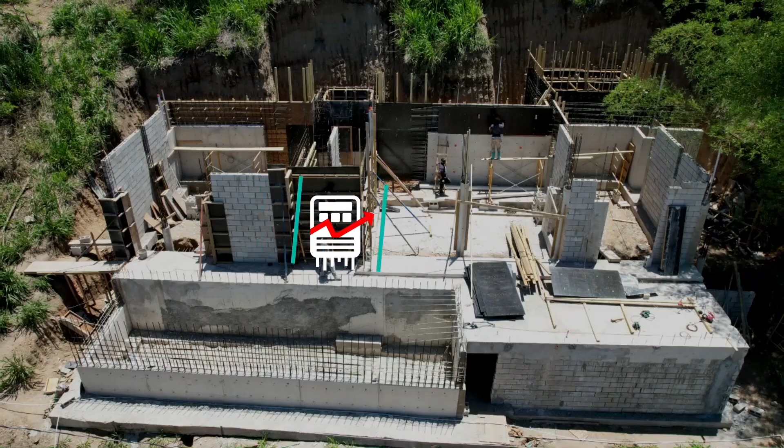Today I will be doing a video that I don't plan to do another time, because I'm going to change the rules of engagement as it relates to the type of work that I'll associate myself with. I'm trying to get stricter because it seems like persons who want to do construction think that organizing and getting work done is just a matter of coincidence. I've said many times that you can't expect good outcomes when you do bad planning.

So the topic of the day will be Pennywise and pound foolish again. What you see on display is a drawing that was sent to me related to consultation and management. Upon looking at it, I can see it has a lot of flaws. Based on the amount of detail a person puts into a file, it tells me a lot about the person doing the drawing, as well as the type of customer.

Many times, the customers who go for these persons assume that spending a certain amount of money on a drawing file is too much. So they'll take almost anybody willing to do a drawing, as long as they hear that person has connections to the parish council to get things approved. I'm told this person did similar drawings in the same community and got them approved. I don't know how, but based on the work ethic I'm seeing here, it's not in any kind of order for anybody to go to any parish council and even be considered serious.

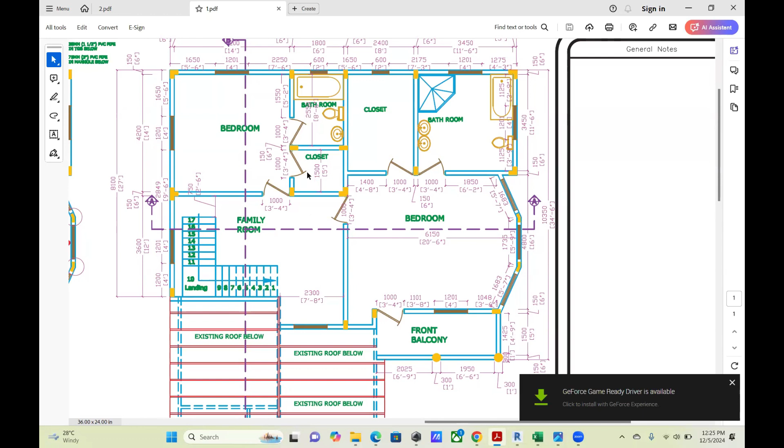This is an issue I keep bringing up because I see so much of these drawings coming to me. Whenever I mention that the coordination of the file is not done properly, people often try to justify it by saying the parish council has approved it, or the person who did the drawing has done many drawings before, some kind of bullcrap like that. But with my experience, I know that whenever things are out of line, it becomes problematic on the ground.

You don't want a scenario where the person executing the construction is the only one who knows how to add additional elements, because that's a big gamble. That person can turn around and spoil your building, and you wouldn't be able to know until it's too far gone. So the proper method is always to get the proper files done, and then move up the ladder to additional professionals.

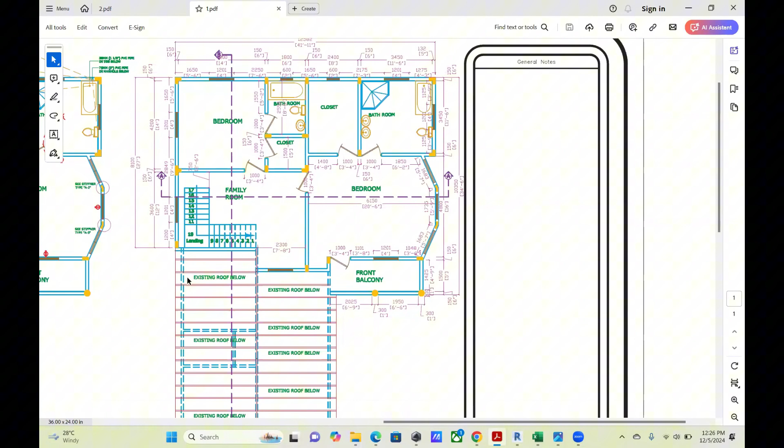Now, this drawing has a lot of errors, one of them being this staircase, and I'm going to mark it up for that reason. One thing I've done is not put the customer's name on this video, as well as the person who did the drawing, because I'm not trying to go down that line. But this step really makes no sense.

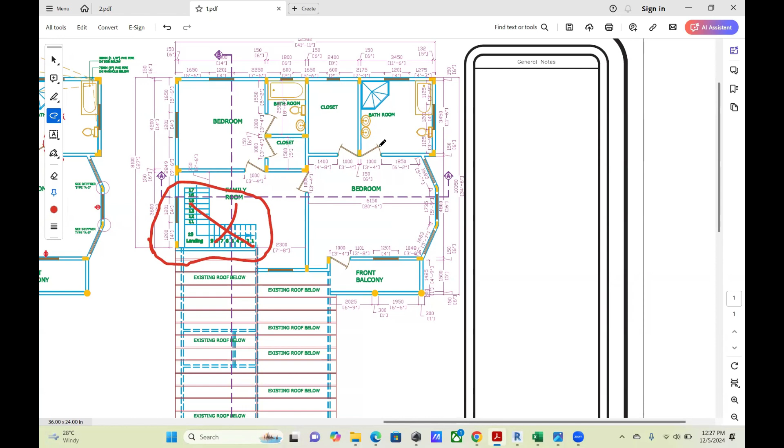2 feet 6 when you're exiting a staircase on a landing makes no sense. This is a no-no. This bathroom, you can see the lower level of attention that the person is giving. Either the person is not properly experienced or the person just does not care.

So this is a bathtub, this is said to be a shower, a very irregular shaped shower. And then this is, I think, trying to say that there's going to be a double face basin. But the fact that the door is swinging onto the basin again shows that the person is not paying attention to detail.

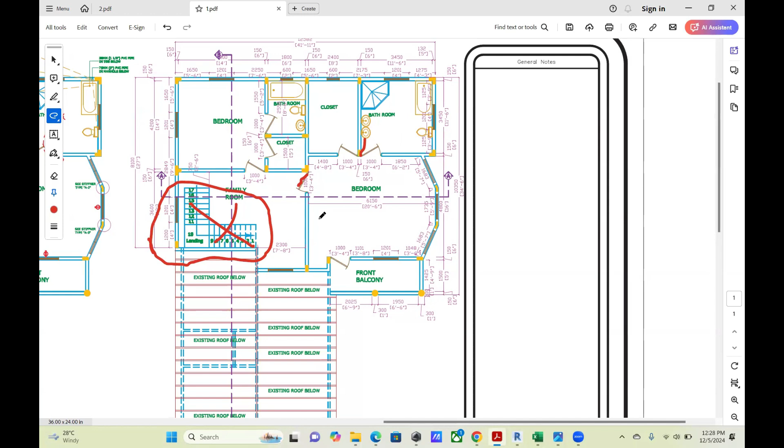Now, other flaws that I can see here: one bedroom door is swinging inwards, this bedroom is swinging outwards. And I'm assuming that this is the master because you have the bigger bathroom. So this is another pointer error that is on display.

Now, on the ground floor, there's also a few things out of line. Between the stairs and this outer wall, there's a difference. So more than likely, there's going to be a cantilever space made on the side, and therefore all of this area is going to be wasted space with little to no usage.

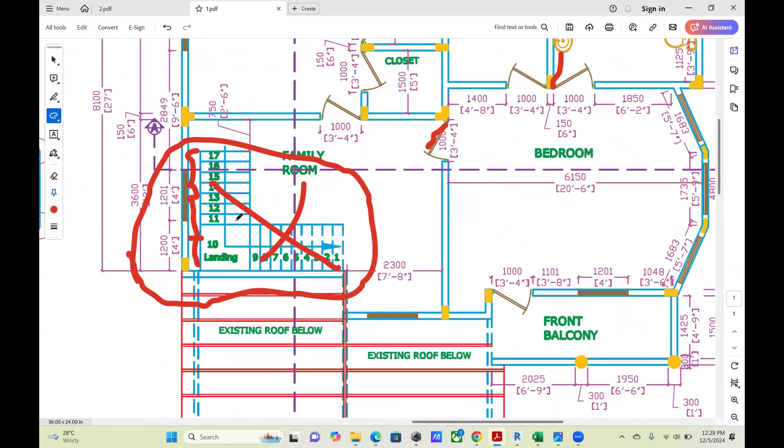Other things to include: how the kitchen is laid out. There's an island within the kitchen, but this island obviously does not have any consideration for things like a person that is going to sit on chairs or etc. Regardless of it being a big kitchen, the space is poorly designed.

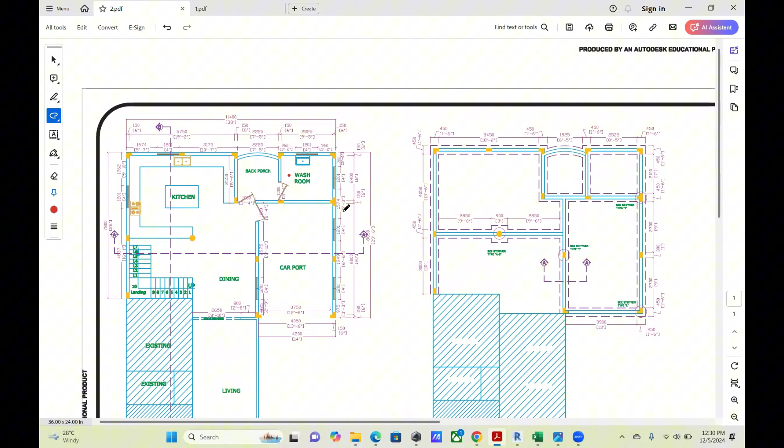Now, the additional things required for this area is that the customer requires a storage area. There needs to be a helper's room or another bedroom that can be used by a helper or as a guest room. That's missing. So the drawing is basically wrong. And because it's that wrong, no matter how you're going to hear a workman say 'hey, I can fix it on the ground,' you are really setting up yourself for a major issue when the work starts.

So that's wrong, and on the first floor, it's pretty much wrong too because it's a similar scenario. The other bedroom is absent, as well as the customer wanted to go on top of the building. There's no setup for that in this particular situation.

Now, Pennywise, when I mention it, I always mention it mostly around drawings. In other cases, you'd have situations where customers get quotations from construction workers and they do not want to pay anybody to do assessments. But I'm not really dwelling on that as yet, because I'm closing off this kind of file. I'm just going to use the drawing again in this scenario.

So this is one of these situations again. The customer has an area that they are willing to work with - in this case, it's 2,800. Person A is saying at least 150. Person B is saying $90. Person B seems cheaper. But the problem with it is this: Person B is not paying attention to the details.

So even when the customer thinks they have saved money, they're still heading along a path that's going to lead to a major accident. The drawing is wrong, the person is not competent enough, and that's why they're giving a lower cost. It's not really the case that they can do similar or better work. It's just the case that many times they are more desperate, so they will drop their costs cheaper.

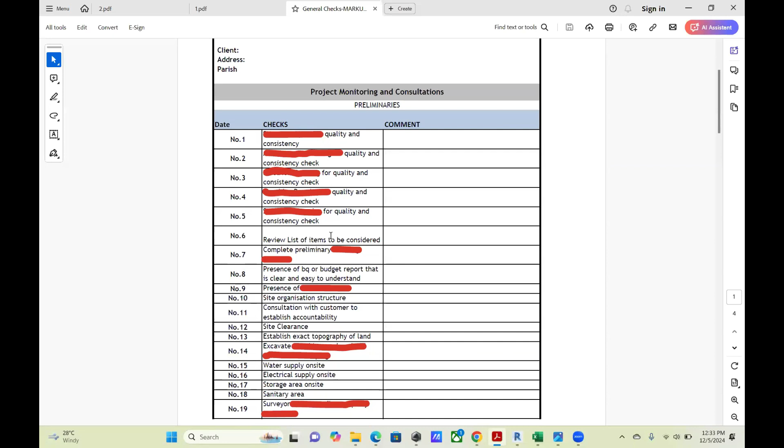I am very wary when people present desperate costs because there's usually a catch down the line. Where the catch will come will be somewhere along in the construction. For me, if the file comes to me, I'm going to do my consistency and quality check, and if it doesn't look right, I'm going to point it out. The Pennywise idea - the customer thinks they'll save $168,000 with a drawing that's not properly done.

Because it's a customer that is reasonable and I can have a discussion with, what I was asked to do in this situation was to map up what works were done before, and I actually pulled in my technical people to get it done.

One of the first things we did was establish what the exact square footage of the space was. If you're not in construction, it might be hard for you, but because of the experience we have, we know how to retrace and check it back.

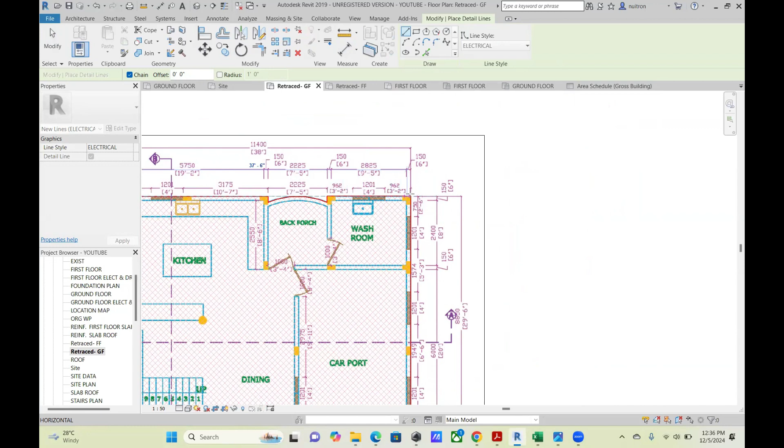If you want to just make a rough check, I can show it here. This is saying the building is supposed to be a particular length, and I'm not going to check every last corner. They are saying that should be 38. If you follow the marker at the top of the screen, you'll see 38 on display. And it's saying you're 26 feet this way. Follow the measurement in the middle again, you'll see 26.

So basically, I know that scaling this, I'm getting something as near as accurate to the program that the person used. In this case, I'm going to use the 1075 seen right here, and 1,290 at this particular location. So this is not even me saying it—the computer is retracing it and confirming that these are the two areas I need to consider.

Adding both of these together, I'm getting a total square footage of 2,365 square feet, which is projecting the construction related cost to be about $33.1 million if I'm using a unit rate of $14,000.

So what I have down here is the amended area, because as I said, this file was passed over to me to map up. The amended area I'm getting is 2,798, which basically means there's a difference in value of over $6 million that is at play.

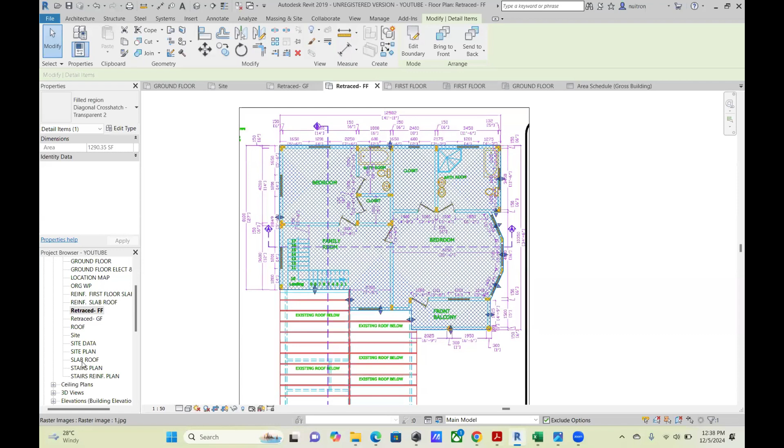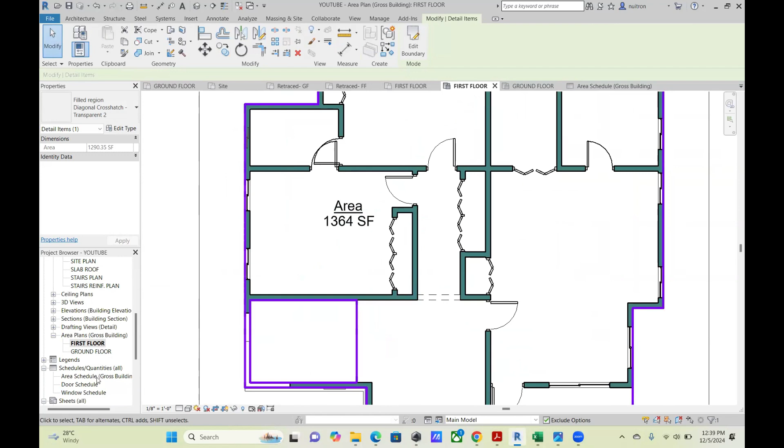Now, many times when you do these things, people will often ask, how did you get yours? So I'm not going to hide it. This is the area calculator that comes with the program. This is the adjusted model that I did for the person, and this is for the ground floor. Then it's retraced to show what the first floor is. The program also combines the area together, which says 2,798 square feet, the same as you have right here.

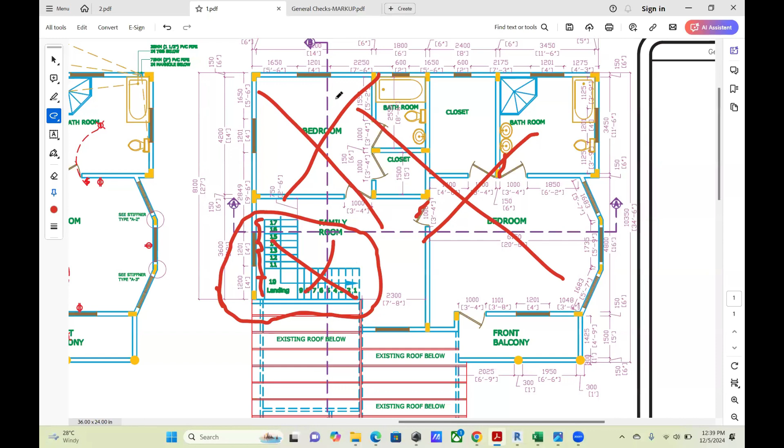This is the difference. But one would say the file we adjusted is larger than the original file, so it would look like we are pushing up the construction value. The problem here is there's supposed to be another bedroom that should be considered on the first floor.

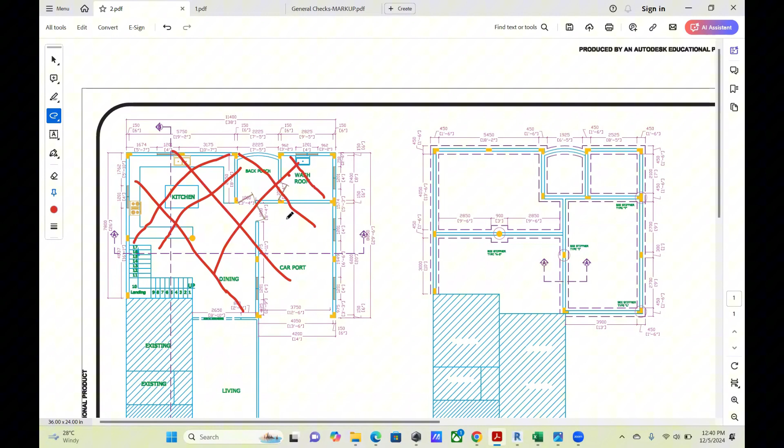And likewise, on the ground floor, there should be a bedroom and a bathroom also considered, along with a storage area because the person is planning to go solar. So that kind of provision, that type of storage setup, has to be made for the person to store batteries and stuff like that. Because of that, yes, this square footage looks smaller, but it does not match the customer's scope. So this is one of them tricks of the trade kind of scenario.

It looks like somebody has drawn something for you that's going to be cheaper, but because it's missing the scope, eventually you might go $6 million upwards.

Now, what I can do quick and fast is actual rough checks. So what I'm going to say is this: this is the amended file that we did, and this is the file that they did. So there's a difference of 433 square feet.

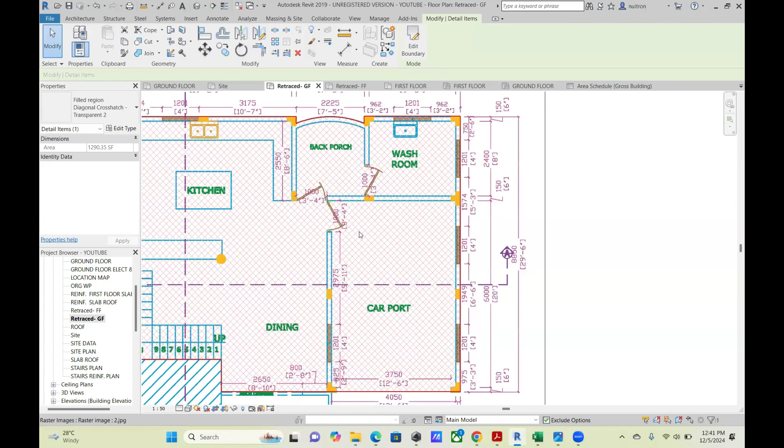Now, because I don't want to waste time putting it on the drawing, I'm going to just use the area calculator on Excel. I'm going to create a new sheet and say bedroom, and that's on the ground floor, 12 by 12. Then I'm going to put the area here to see what the additional scope would come to: bedroom on the ground floor, 12 by 12.

I am going to say bathroom—that's something from the scope that's missing—and say that's 5 by 9 or 5 by 8.5. The next thing I'm going to add is storage.

And that is because the customer said they need that storage space to put things like solar batteries, etc. So I'm going to be generous with that. I'm going to say that is 5 feet by 6 feet, and that storage should say GF.

Now for the first floor, we are going to need another bedroom, so I'm going to put that in as 12 by 14. Additionally, I am going to add closet spaces, which I didn't put on the ground floor. So I'm just going to be generous with that, 2 feet by 6 feet, and I'm going to add one up here as well, 2 feet by 6 feet.

And then make that calculate. So that's pushing it to 411. Notice before, the difference was 433 square feet. And with all of this square footage that I'm putting on, I have not yet considered the inclusion of walls. Walls usually push up the figure a minimum of an additional 15%. So if I multiply that by 1.15, which is equivalent to 15%, that's going to say the final is 472 or 473 final area.

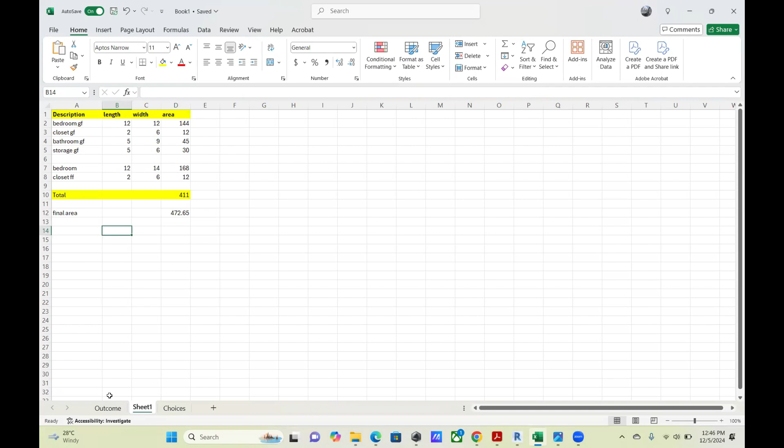So these are common problems that we run into. Sometimes we get tired of it, and I'm kind of getting tired of it now, because people keep finding these people who draw up the files and send them out saying, alright, parish council approved it, so it's all good. And I say, no, I cannot put cost to a file that is going to continuously be changing on site, because when the bill overruns, you're going to say I did a calculation wrong. When the fact is that the person you hired, who you think is helping you save money, is not following the scope, is missing out information and misrepresenting information.

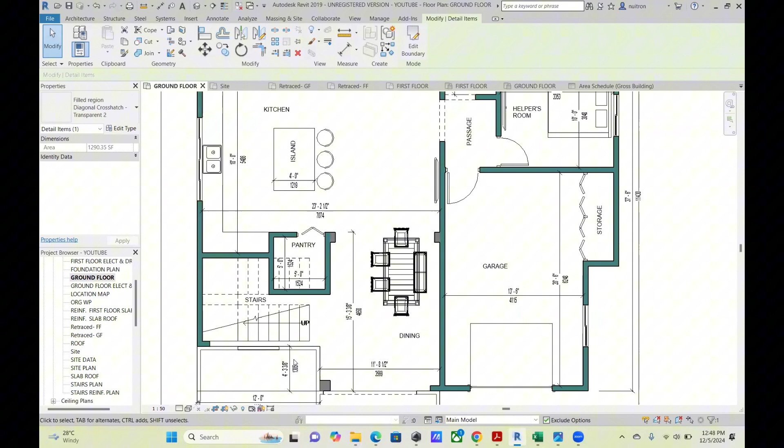Before I go, I'm just going to show you what we reproduced. Customer wanted a bedroom to use as helper's quarters. There's a bedroom that was considered, a bathroom that the helper's room or guest room has, the laundry, and a little storage area. Didn't use a big one, but a little storage area is here. This is a kitchen space, still has an island, but has consideration for seating. There's a pantry, which was not originally in the other drawing, and then you have a staircase that's scaled much better.

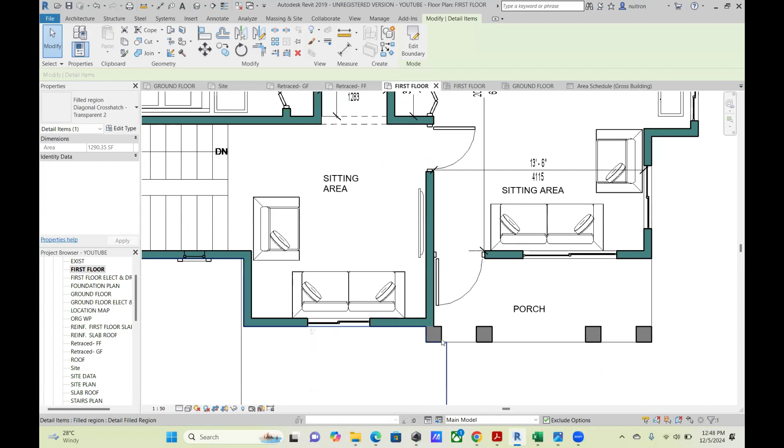On the first floor, 1 bedroom, 2 bedroom, a 3rd bedroom. This is a master setup, master bathroom that has a tub and a shower, toilet, a double face basin. A bathroom that's shared between these 2 bedrooms, accessed from inside the bedrooms, that is added, and there's a little seating area. So this is our adjustment. It might not be excessive, it might not be over the top, but all of the things related to the scope of works are now represented, and the customer can have a better appreciation.

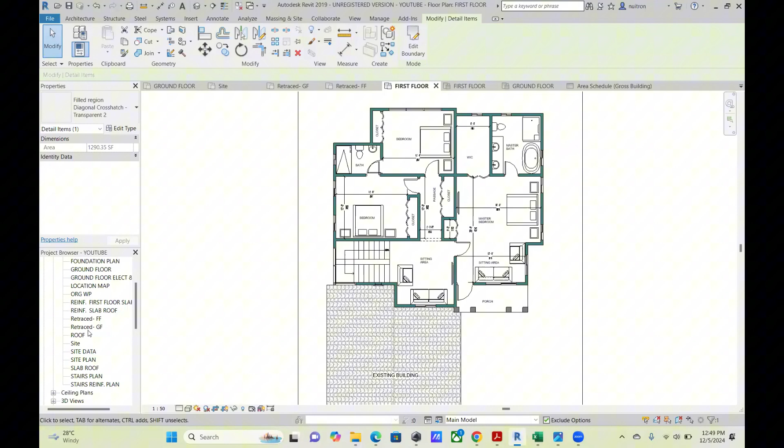Because what we have done is put in the locations of some of the furniture so the customer understands how the space would be used, where TVs would be, where beds would be, stuff like that. Now, based on the advice of my team, I can't really present the people in 3D and exterior presentations, but that's what we did, we adjusted it. It's the same yard, it can be done just the same. The scope can be matched, but the choices you make will determine whether you get something that seems okay or something over your budget.

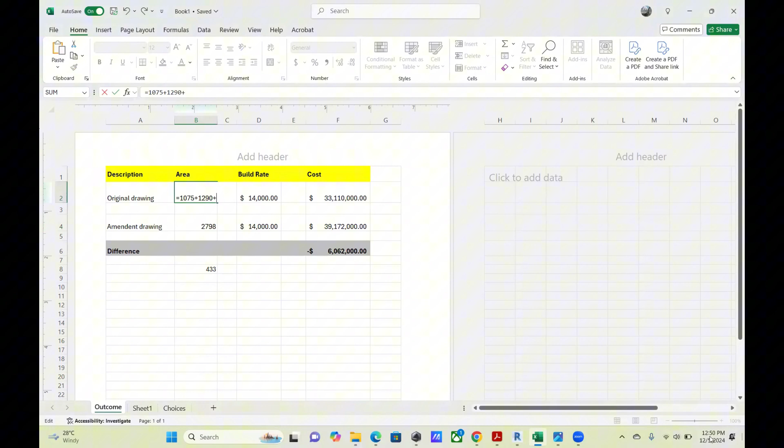So let me do a final thing here, I'm going to add the area total, which was considered here, to add to the scope. And if I put it there, it's larger than what we even have, because that would be pushing the square footage to 2,837, and ours were 2,798. So that's where I'm going to close off for today.

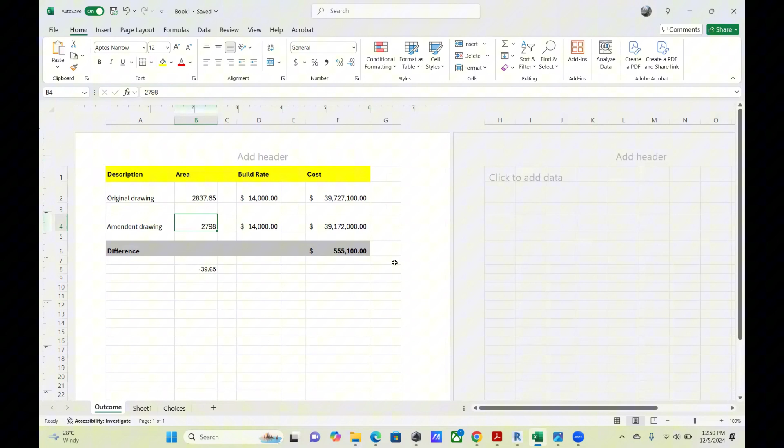And this is my final warning. Most of these files, when they come now, I'm just going to say either get somebody else to do the file, and I'm just going to point you to these videos as to why it makes no sense for us to do calculations related to construction costs when the files do not match the scope of works.